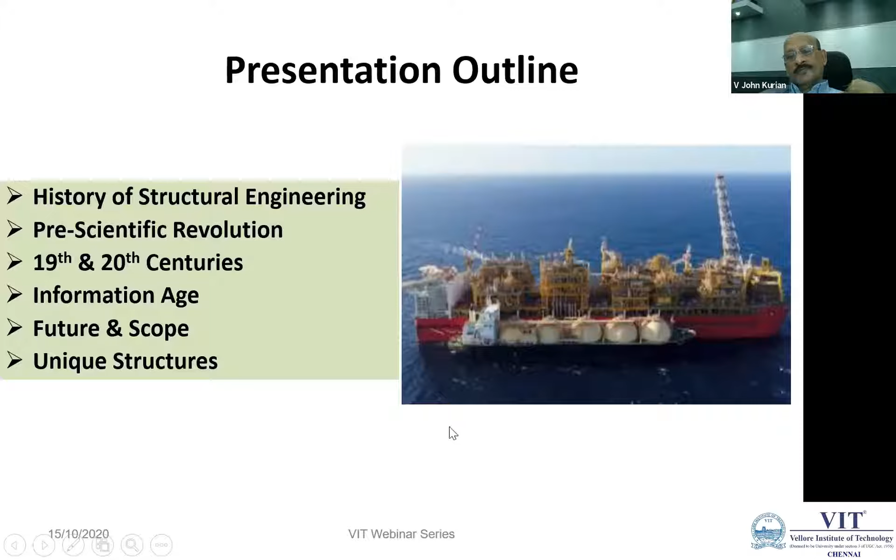The photograph I have shown there is a very large structure - it's the largest floating facility in the world now. It's on the Australian west coast, about as long as three soccer fields. I'll be mentioning briefly about that.

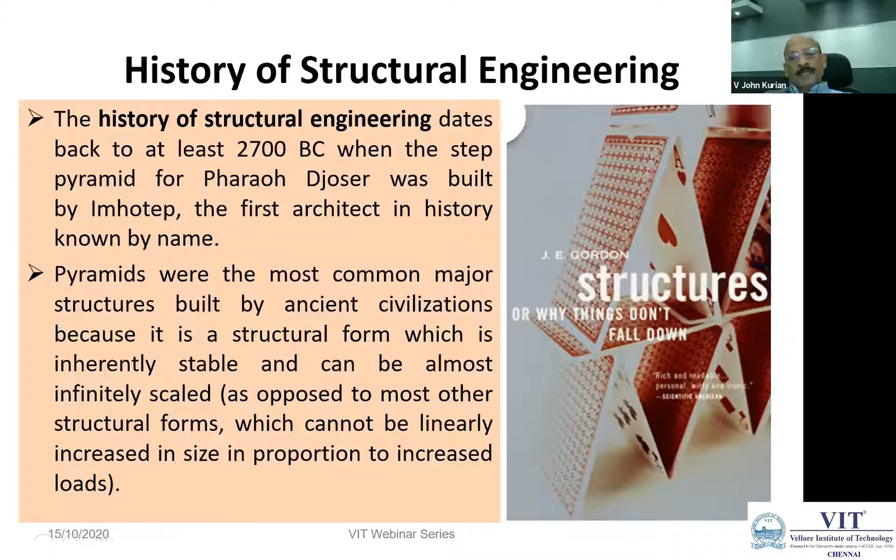This history of structural engineering dates back to 2700 BC. The first major structure built was the step pyramid for Pharaoh Djoser. It was built by the first architect in history known by name, Imhotep. These were the most common major structures built by ancient civilizations because the shape of a pyramid is an inherently stable shape. We can increase the size to any amount, unlike other unstable forms. This form can be linearly increased in size proportional to the loads.

Another notable engineering feat from antiquity still in use is the qanat water management system, something like an aqueduct system. It was constructed around 1000 BC, meaning it's about 3000 years old, and it's still 71 kilometers long and still being used. It was in modern day Iran, at that time called Medes, the predecessors of the Persian Empire. It's one of the major developments in civil and structural engineering, a notable old one.

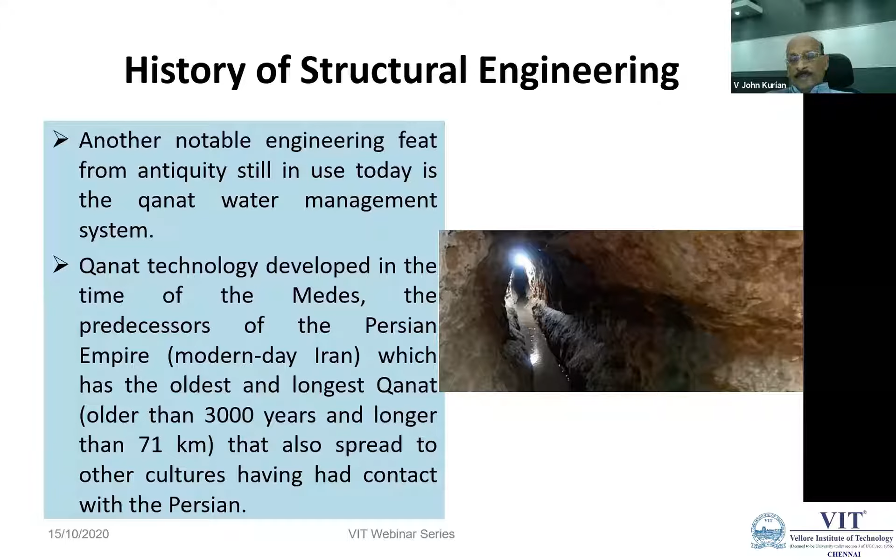Now, summarizing the history: the few points worth noting are that throughout ancient and medieval history, most architectural design and construction was carried out by artisans such as masons and carpenters, and they were the people in charge of the building as well. So they were called master builders, carpenters and masons, who were in charge of architecture as well as construction.

There was no mention of theory of structures there, no calculations were done, and how the structure stood was decided based on the evidence of what had worked before. If they construct, say, a 2-story building and it is standing, they continue to construct 2-story buildings like that using the same materials, then try for another story. If it's successful, they repeat that. There were no calculations or anything; it was based on the materials available at that time, mainly stones and timber.

So the knowledge was retained by guilds, and this knowledge was not supplanted by advances. Structures were repetitive, and increase in scale was only incremental. It was all repetition of the same type of structure. They constructed a structure, it was standing there, meaning similar structures were built nearby based upon the needs.

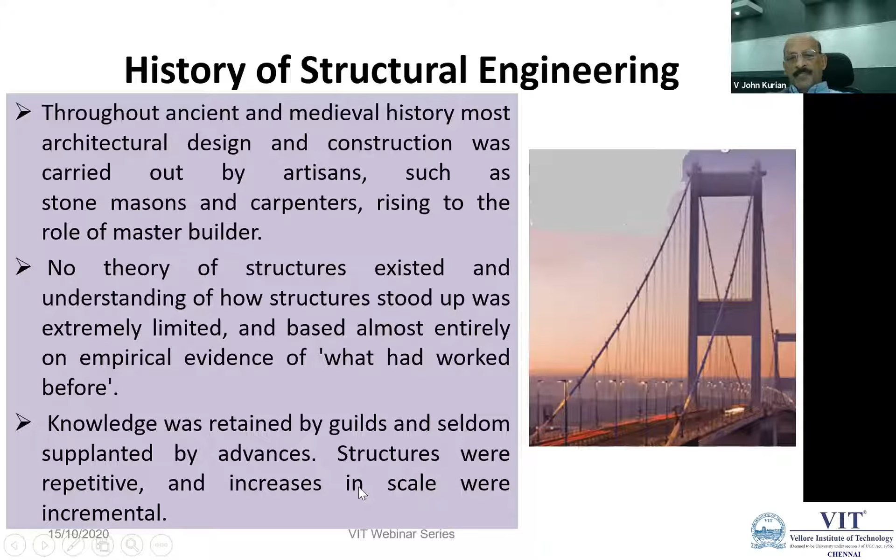So there is no record of this, when you talk of structural engineering we mainly think of engineering mechanics, mechanics of solids, or strength of materials. There was no record of such calculations on the strength of materials or strength of members.

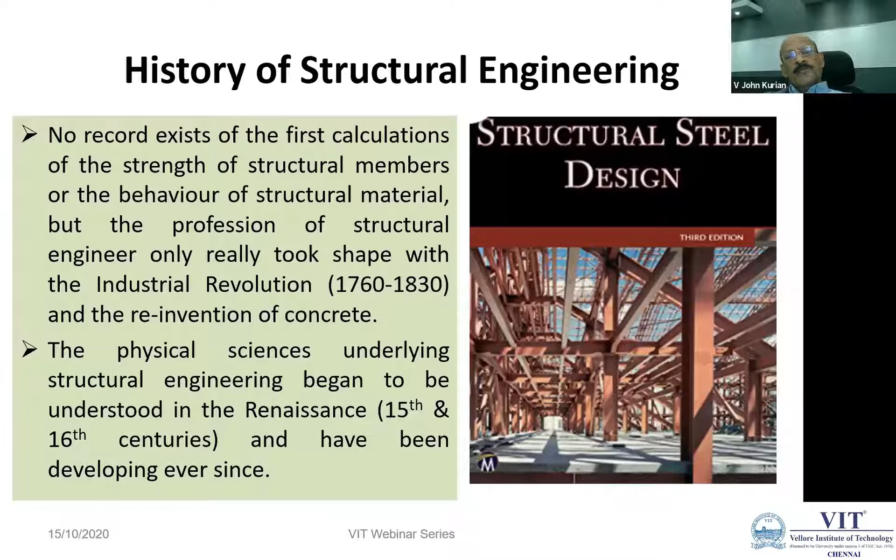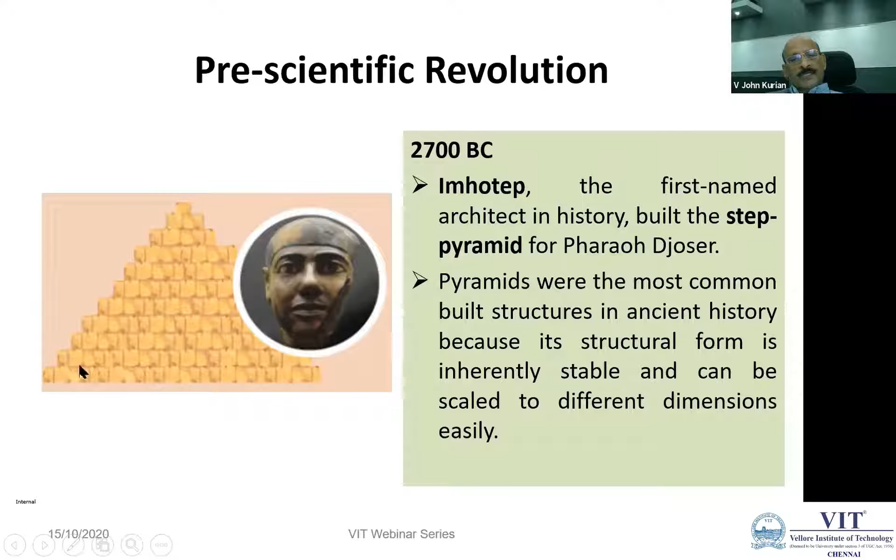Imhotep, the first architect in history, built the pyramid for Pharaoh Djoser - that was the name of the Pharaoh. This is all recorded and available with documents. Pyramids were the most common built structures in ancient times because their structural form was inherently stable, and it can be scaled to any dimension easily. That was the first one, remember it is 2700 BC. Imhotep was the name of the first architect in Egypt. It is called the step pyramid - you can see the size in the photograph and sketch there, stone over stone, it is a step pyramid.

In 2560 BC, the Great Pyramid of Giza was built. It remained the largest man-made structure for millennia until the rise of towers in the 19th century.

Some of you may know the famous film called Ten Commandments. I remember when I was schooling in Chengannur, all the students were taken from school to the nearby theater to see that great film. That is when we saw the Egyptian slaves, the Hebrew slaves, working for the Egyptian King Pharaoh. It showed these pyramids being constructed very clearly, and they were using labor. They were lifting stones using pulleys, a lever and cable system, and human labor.

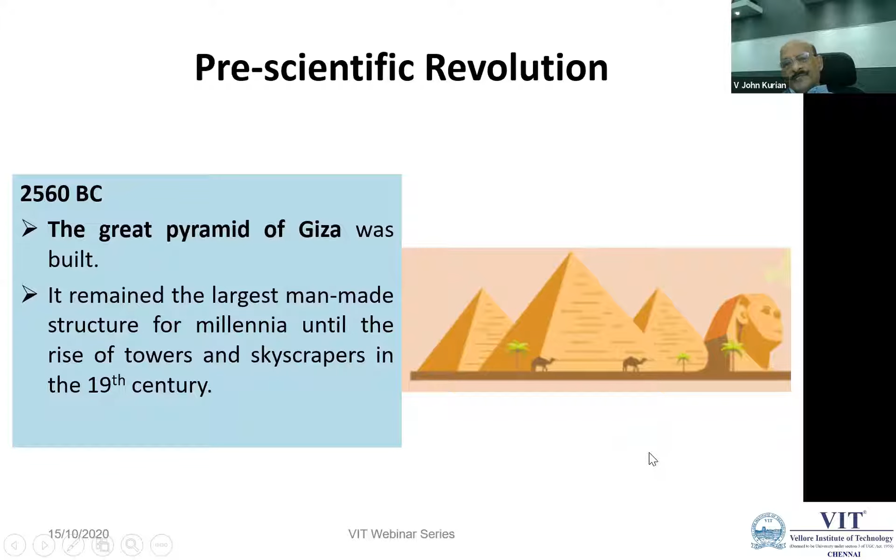3rd century BC: now we'll see some familiar names from undergraduate studies. Archimedes published his work in the 3rd century BC. His calculations on areas and centers of gravity of various geometric figures, including triangles, paraboloids, and hemispheres, underpin most of the mathematics and principles of structures in modern structural engineering. This is the first published work on structural engineering.

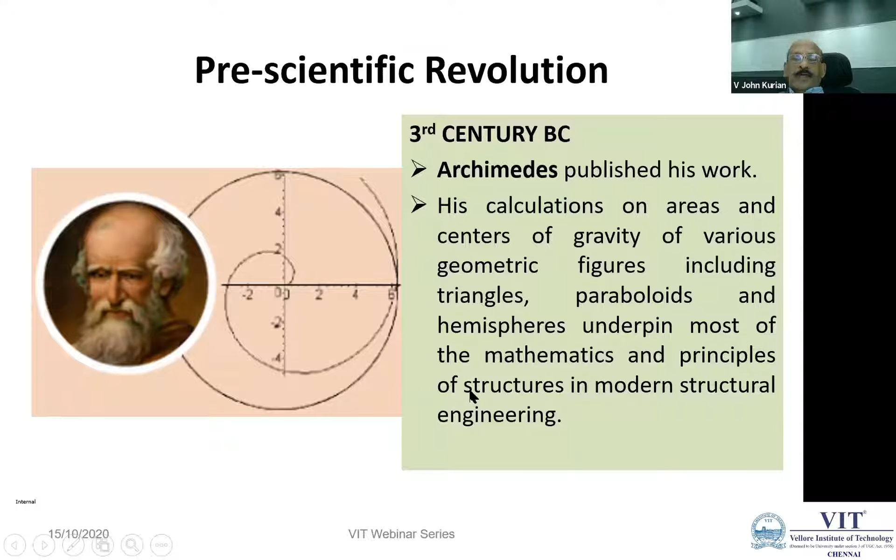His calculations covered areas, volumes, and centers of gravity of various shapes.

1st century BC, Vitruvius recorded in his book De Architectura the methods, materials, and machines used by ancient Romans to build structures such as aqueducts for transporting water, and thermae, meaning thermal baths, which required structural engineering methods, as well as columns, lighthouses, defensive walls, and harbours.

At that time, constructions used available materials and available technology. Even though the technology wasn't written down and they didn't know the underlying mechanics, they used known practices, limiting spans and heights of columns, and spans of beams made of stone or timber.

Ancient Romans were, as we've heard in history, very skilled, as the Roman empire was expanding, building roads, bridges, and other structures. Vitruvius recorded in the 1st century the methods, materials, and machines used by the Romans to build aqueducts, thermae, columns, lighthouses, and defensive walls, since they were warriors expanding their territories, always using defensive walls and harbours because the main mode of transportation was by ships.

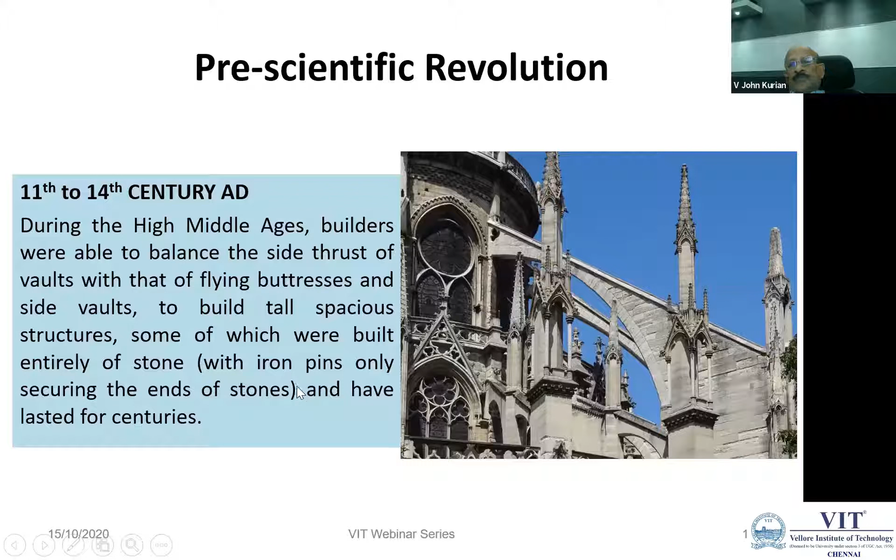Their connections were made using iron pins, with stones connected this way, as shown in some examples. These were special stones, quarried and shaped to suit these purposes. That was from the 11th to 14th century AD.

1638, this is a familiar name for us. You can see the sketch there, gravity, mass, inertia, like that term. So that is where we know of these terms now.

Galileo Galilei published, this is the name of the book, Dialogues Relating to Two New Sciences, where he outlined the sciences of strength of materials, that is what we call these days mechanics of solids or solid mechanics, strength of materials and motion of objects. So that is when dynamics comes in, motion of objects. Two new sciences, that is what Galileo published, dialogues relating to the principles of mass, inertia, gravity, everything there.

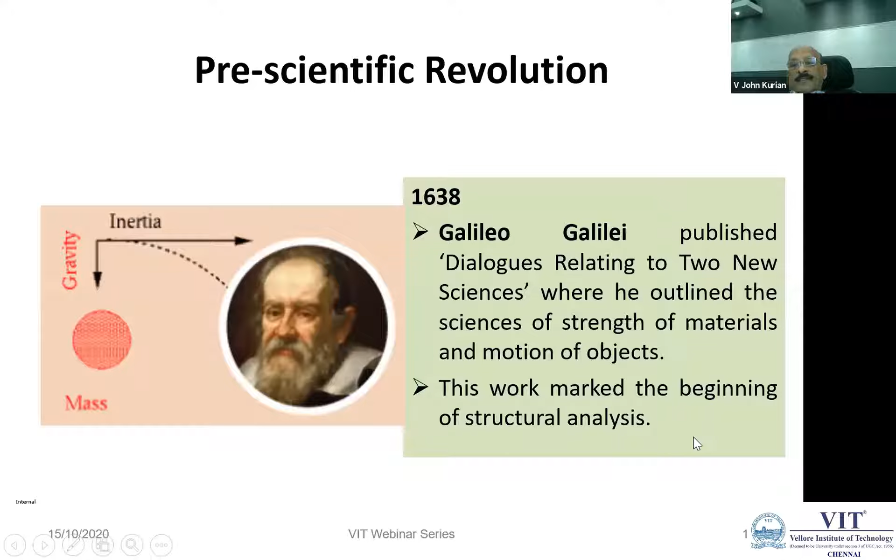This work marked the beginning of structural analysis. That is 1638. We are beginning structural analysis there with Galileo. He is the one who published this book. You are very much familiar about this person, Hooke's law.

The first thing that we studied in strength of materials, stress by strain is modulus of elasticity, capital E. That is within the limit of proportionality. It is very close to the elastic limit, very close to the yield stress. You can see the sketch shown there, that is when a force is applied, it elongates by x. So we can measure the stress and strain and find out the modulus.

When the force is doubled, the elongation is double x. That is what is shown here. This is Robert Hooke. His first statement of Hooke's law provided a scientific explanation of elasticity of materials and their behavior under load. That is 1676.

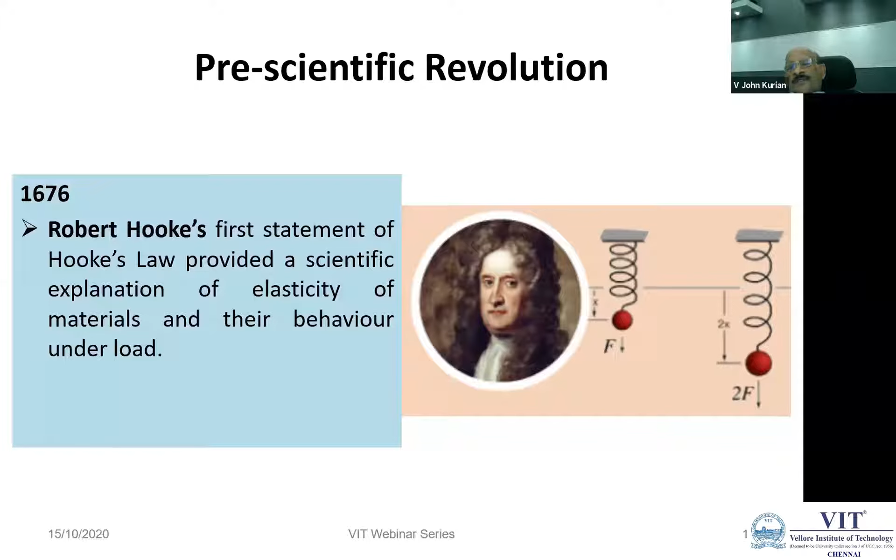Now 1687, Isaac Newton, very famous. You know his three laws, that is what we started in statics and dynamics. Isaac Newton's three laws, that is what we always remember, especially the third law: to every action there is an equal and opposite reaction. I used to tell my students, this is applicable only for structural engineering, but in actual life, you should not react. Okay, look at this book.

Isaac Newton published Philosophiae Naturalis Principia Mathematica, wherein his laws of motion provided an understanding of the fundamental laws governing built structures. That is where he published these three laws of Newton.

Then Newton joined with Gottfried Leibniz. They independently developed the fundamental theory of calculus, which is considered the most important mathematical tool in engineering. You know that every calculation in mechanics of solids, strength of materials, or structural analysis, we always make use of calculus. You know, the differential of shear forces,

UDL load, differential of bending moment is shear force, and when you integrate for y displacement, we get EI into d squared y by dx squared equal to M. You know how to calculate deflection and slope, always starting from the fundamental bending equation. So the theory of calculus is the fundamental important mathematical tool in engineering.

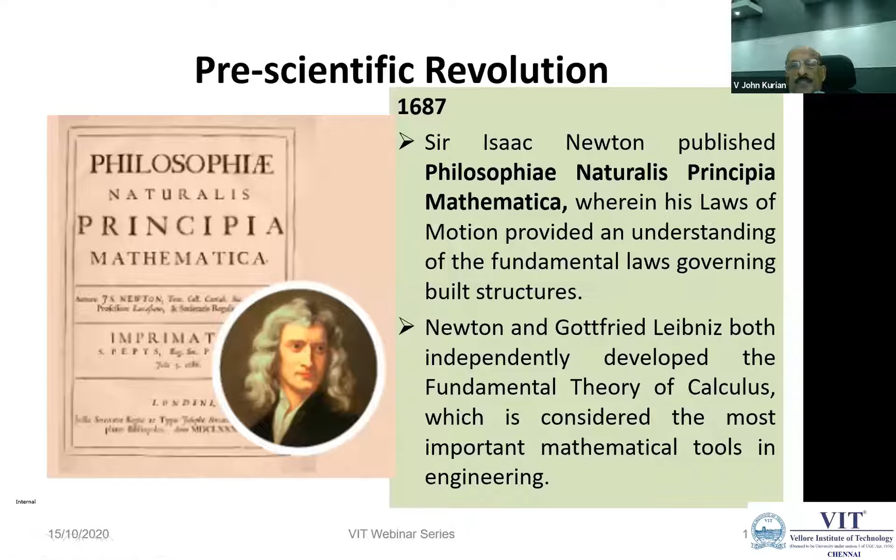The fundamental theory underlying most structural engineering design was developed by Euler and Bernoulli. Then Daniel Bernoulli and Jean Bernoulli also developed the theory of virtual work, which I know is the basic fundamental for finite element analysis. The theory of virtual work is a structural analysis tool that uses equilibrium of forces and compatibility of geometry in solving structural problems. All of you remember, especially third year, second year onwards, that there are different types of methods of analysis.

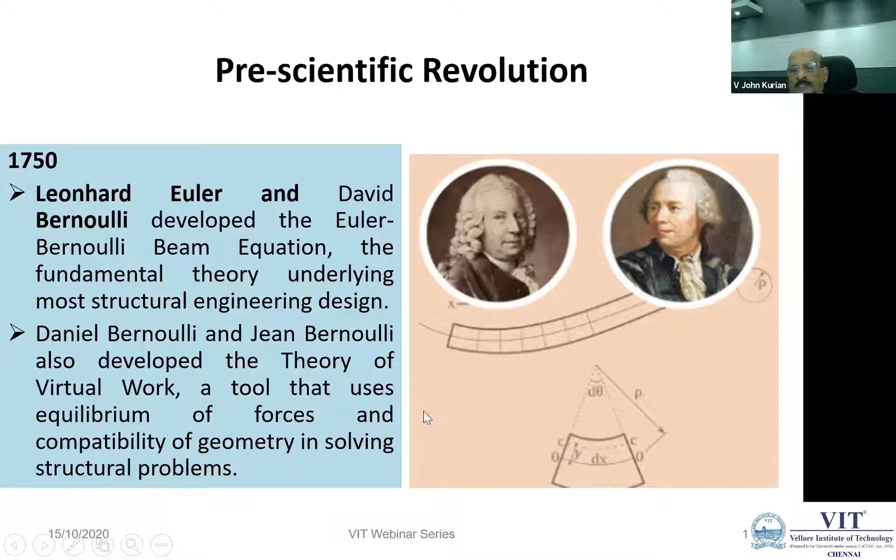Basically, there are two methods, force method and displacement method. Both these methods use equations of equilibrium of forces, as well as compatibility conditions. I'll talk about that later when we come to another slide. There is a misconception or misunderstanding among many students about force method, they're not very clear about these two methods. I may give a little idea when we come to that.

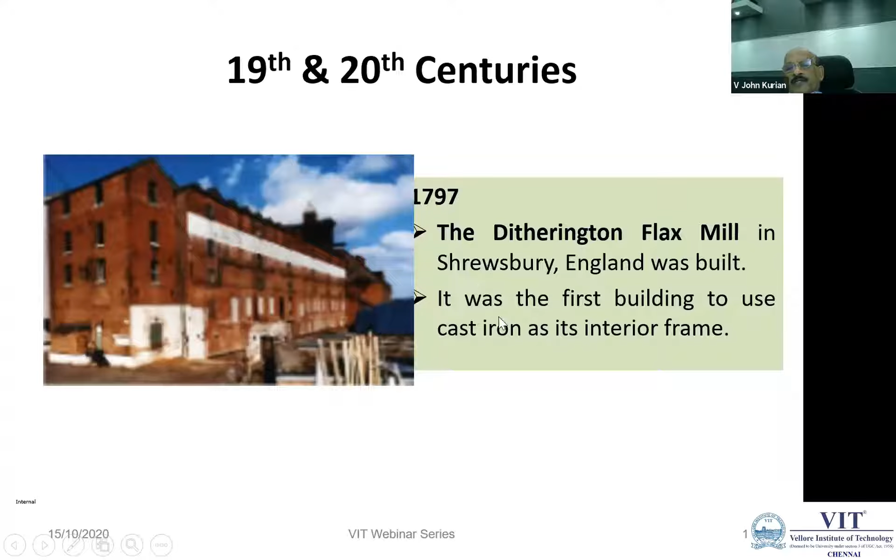In the 19th and 20th centuries, the Ditherington Flax Mill in Shrewsbury, England was built. It was the first building to use, now you see materials are developing, cast iron as its interior frame. Till that time, only masonry, stones, or timber were used, or concrete using the available cement at that time. But that was in 1797, they used the first building using cast iron.

In 1804, Belper North Mill, the world's first fireproof building, was built. This first fireproof building was built making use of cast iron. So they used the principles available at that time and made sure that the building was fireproof.

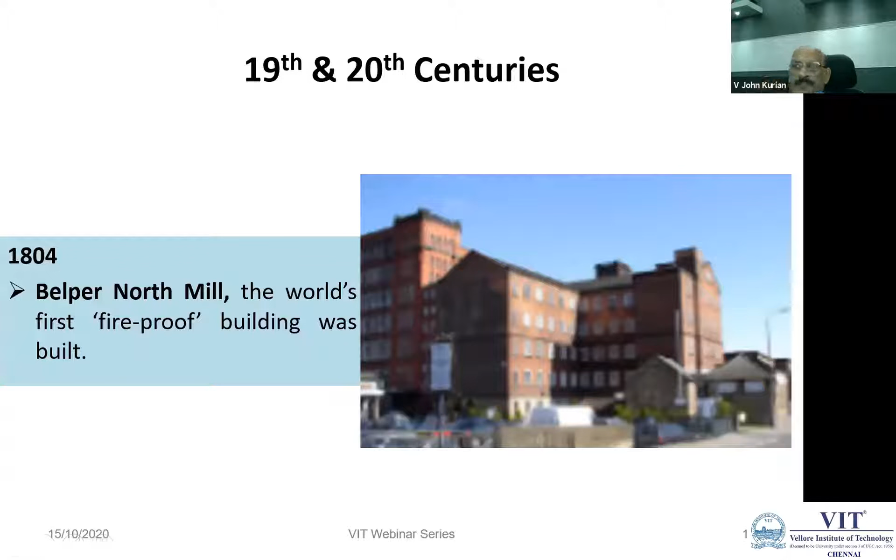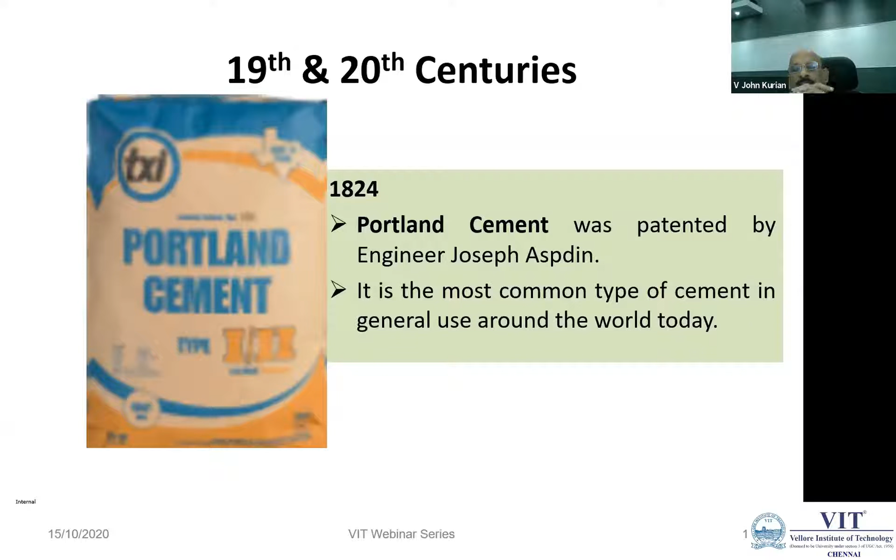In the 19th and 20th centuries, Claude Louis Navier published the elastic theory of beams. This is the elastic theory of bending of beams, and the fundamental derivation of the bending equation, where you derive E by R equals M by I equals sigma by Y. This is all based on the elastic theory of beams, where you use bending.

This person is very famous and can be called the founder of modern structural analysis, because he was the first to highlight that the duty of a structural engineer is not to understand the final failed state of a structure, but to prevent that failure in the first place. It's very important. Till that time, the engineer in charge of the work was only able to find out the failed state of a structure. But Navier made it clear that the duty of an engineer should be to prevent failure in the first place, not just understand it.

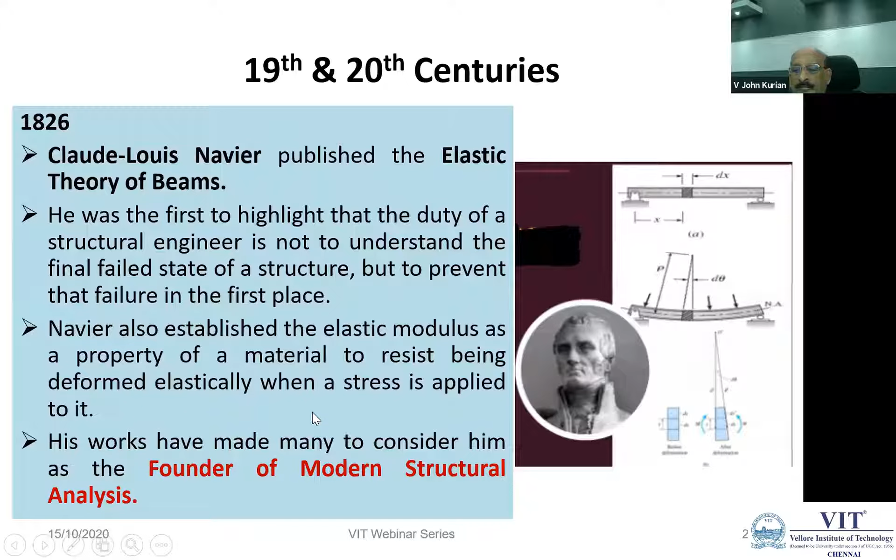He is the one who established the elastic modulus, capital E, for direct stress, as the property of a material to resist being deformed elastically when a stress is applied. So the stiffness and flexibility criteria, and the deflection of a beam or slab, all depend upon this elastic property of the material, elastic modulus E. Navier was the one who established that, and many consider him the founder of modern structural analysis. This was in 1826, almost 200 years ago now, when these principles came together for the benefit of structural engineers.

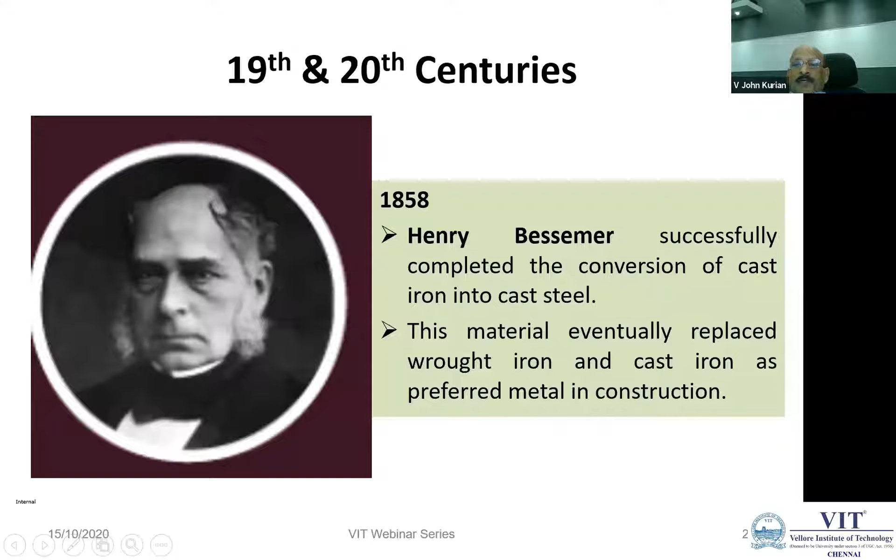In the 19th and 20th century, in 1858, Henry Bessemer successfully completed the conversion of cast iron into cast steel. That's a great development. They were using only cast iron and later wrought iron, and then in 1858 cast steel was developed, which is the main building material now, especially for tall buildings. Concrete and steel are the main building materials now. That material eventually replaced wrought iron and cast iron as the preferred metal in construction.

Some of you may remember, as shown in your brochure, the figure of the Eiffel Tower. Many of us may be under the impression that it is made of steel, but no, it is made of wrought iron. I'll be discussing that now.

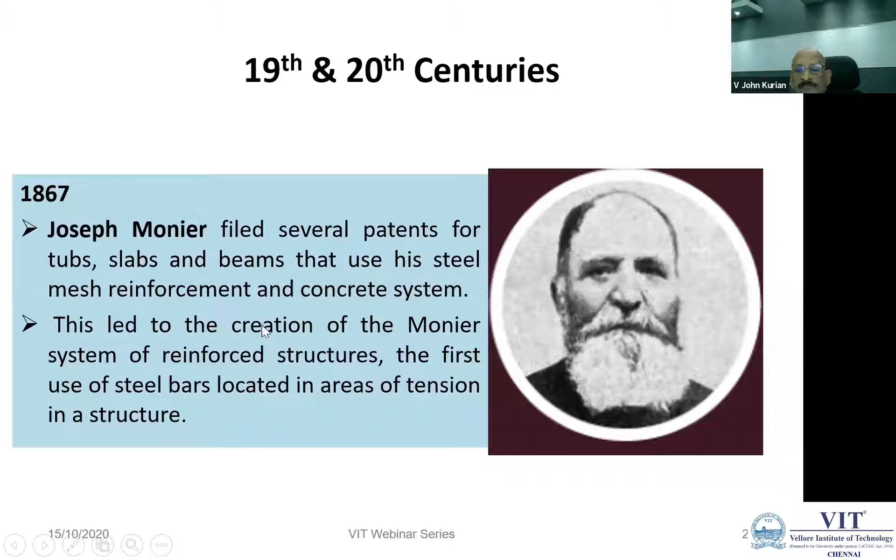In 1867, Joseph Monier filed several patents, when he started using steel mesh reinforcement in concrete systems. He filed several patents for tubs, slabs, and beams using steel mesh reinforcement and concrete, which is when the principle of reinforced concrete came into practice. This led to the creation of the Monier system of reinforced structures, when they started using reinforcement steel bars to solve the problem of concrete's inability to take tension, placing steel bars in areas of tension in a structure. This was a very important development, reinforced concrete, in 1867.

In 1885, William Le Baron Jenney built the Home Insurance Building in Chicago, the first metal framed building and first skyscraper in the world. A frame is beam and column together, connected by braces and everything. This is the first framed building and first skyscraper in the world, built in 1885.

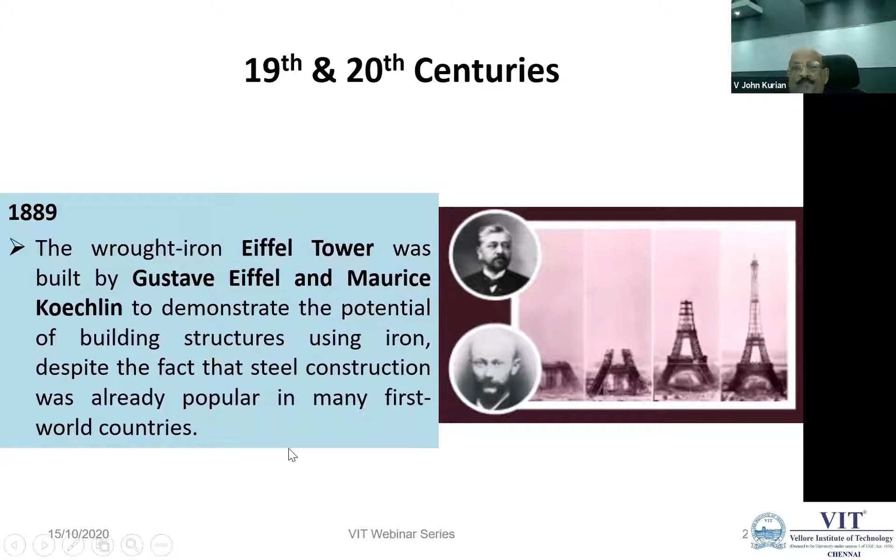Actually, I studied about pre-stressed concrete when I went for postgraduate studies. I remember Professor Srinivasa Rao in IIT Madras. He is an expert in pre-stressed concrete. He's the one who taught us. And he was telling this, I think it is mentioned in this very good book by T.Y. Lin, Pre-stressed Concrete. A very important principle which I have found very useful for me when I teach students about that, pre-stressed concrete. The very important principle is that it is just like prevention is better than cure.

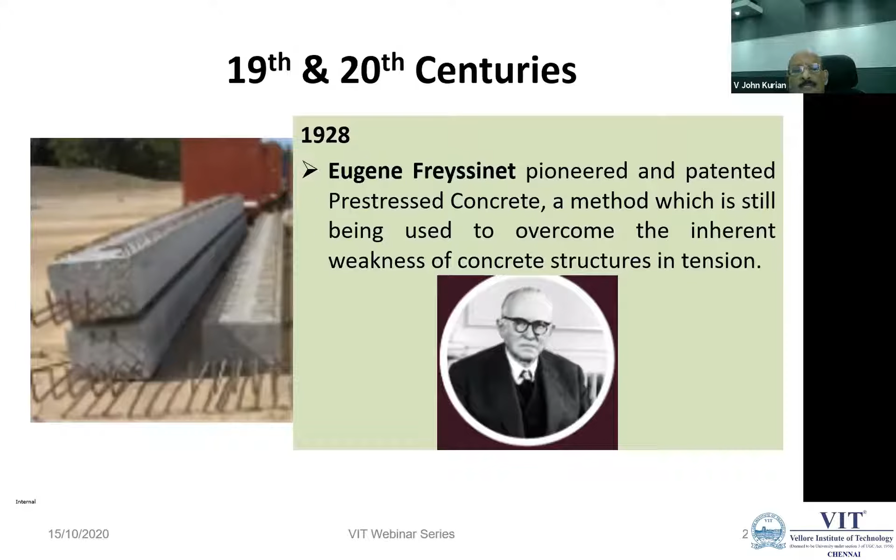1930, Professor Hardy Cross is a very important name. When you talk of moment distribution, Hardy Cross is the person who developed that. In fact, that's a great development in structural engineering. 1930, remember that, Professor Hardy Cross developed the moment distribution method. Only 90 years now. A tool used to approximate the real stresses of complex structures quickly and accurately.

Remember moment distribution? You know about slope deflection. The unknowns are mainly, for a frame, mostly slope and deflection are the unknowns, but mostly for the small problems which we do, other than frames with sway, mostly only the slopes are the unknowns. And when we were students, more than three unknowns, it was very difficult to solve the equations within the time allotted for the examination. So three unknowns, okay, but not more than that at that time, because we did not have calculators. We were using slide rule, and logarithmic tables like that for all these.

When it came to more than three unknowns, it was very difficult even for design engineers. So we developed the moment distribution method, which gave us ideas for when you are developing a multi-story building. If there is a span, there is a moment distribution to be done. We are not taking the whole spans of the multi-story building. What we did was just consider only one story above, one story below, and then only one span to the left, one span to the right, and did approximate moment distributions.

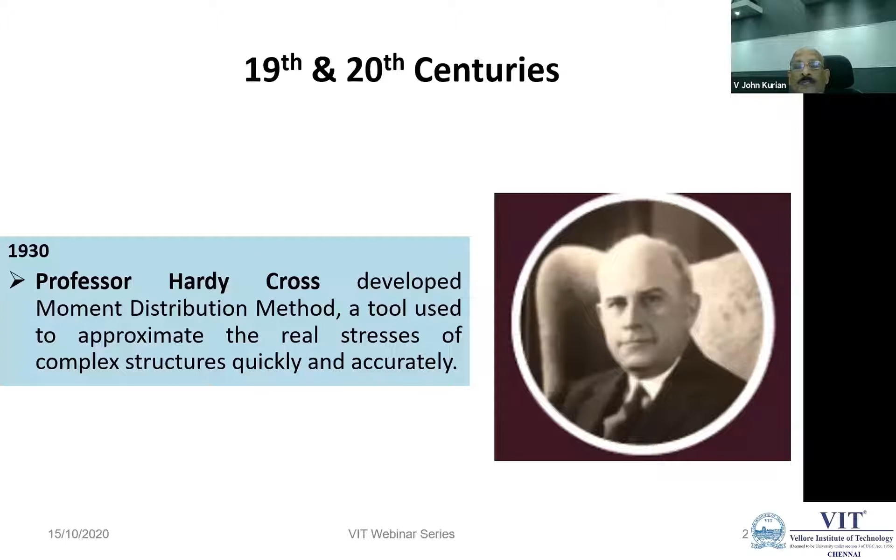Later, it is based on slope deflection method, but when there were more than two or three unknowns, it was very difficult, because we did not have calculators or computers. There was no way to solve equations with more than three unknowns except by written calculations, which took a lot of time.

I added another slide here on force method and displacement method. Probably some of you may not know this. In my career, I interviewed many students during final year projects, and even postgraduate, undergraduate, and PhD students for job interviews. But when I asked them about the fundamentals of this, they didn't have much idea. So please remember this for your benefit.

Consistent deformation method is a force method. What we do is form equations based on the unknowns like the reactions or the joint moments. You write down the equations, and finally it is solved by taking the compatibility conditions. So you develop the unknowns in terms of the displacements, and then use the compatibility condition, just like the simple example of a propped cantilever.

The three-moment theorem also involves writing equations in terms of the joint moments. Finally, we use the compatibility condition using the moment area theorem, equating the intercept on the left side and the intercept on the right side. That is how the three-moment theorem is developed.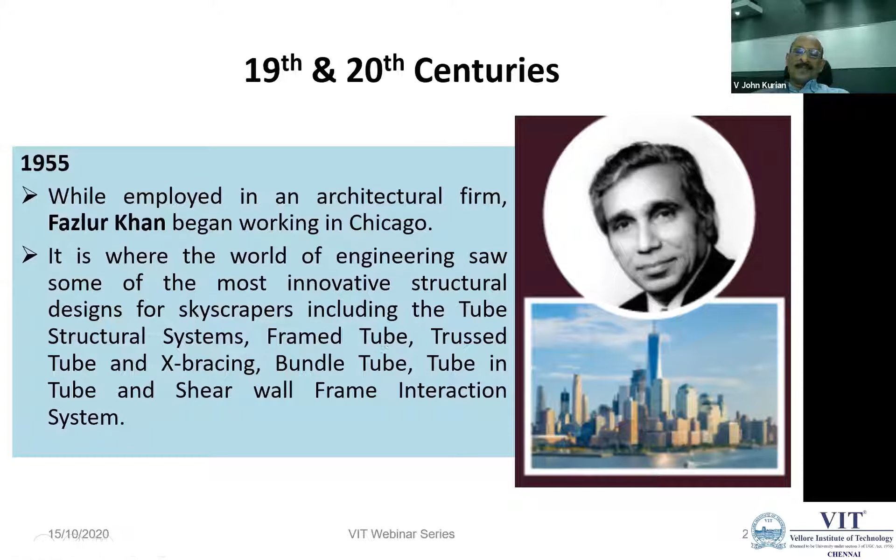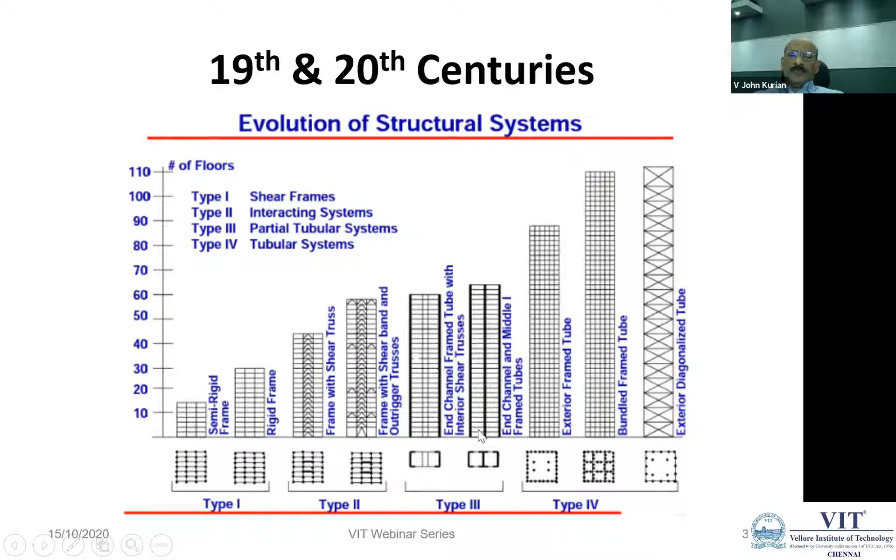I'm showing another slide here showing the evolution of structural systems. Type 1 is shear frame. Type 2 is interacting system. Type 3 is partial tubular system. And type 4 is tubular system. You can get a lot of information on this from websites and literature - the basic information is available, especially on Wikipedia.

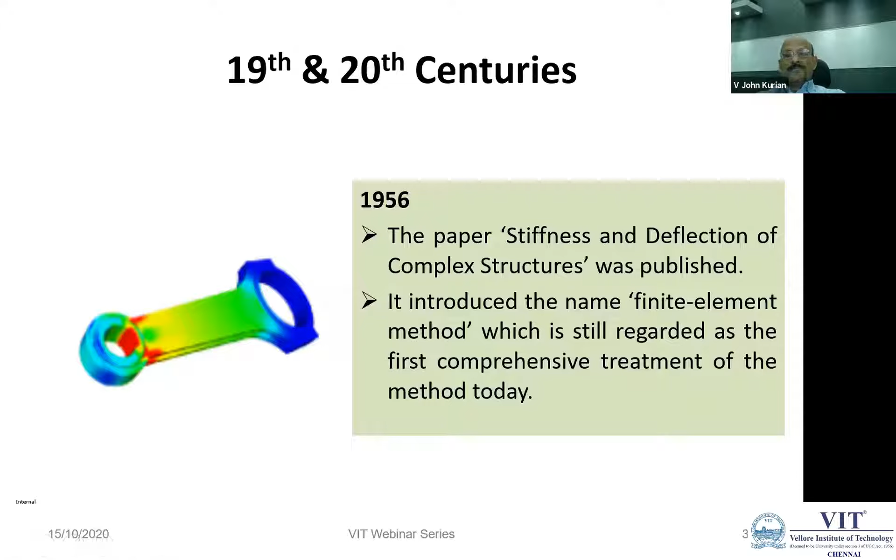Now we're coming to 1956. The paper 'Stiffness and Deflection of Complex Structures' was published, and it introduced the name finite element method, 1956, which is still regarded as the first comprehensive treatment of the method today. When we were students, we did not even hear about this name. What we learned was slope deflection, moment distribution, Kani's method, and we made analyses based on those and did projects. Finite element method was not taught in universities at that time.

1965, Nastran - that is where structural analysis developed first. It is structural analysis done by NASA, US. That program is the foundation for all the structural analysis programs developed later, like STAAD Pro, CSI SAP, SACS, and many other programs. This is the fundamental thing: dividing the structure into finite elements. Depending upon the need for accuracy, the number of elements can be more, and we use different types of elements based on whether it is a plane frame, a solid frame, and so on.

1969, they initiated the first commonly available software called Nastran. They called it that because the company was MacNeal-Schwendler Corporation - so this is called MSC software, MSC Nastran. That is 1969, the first generation of finite element analysis software.

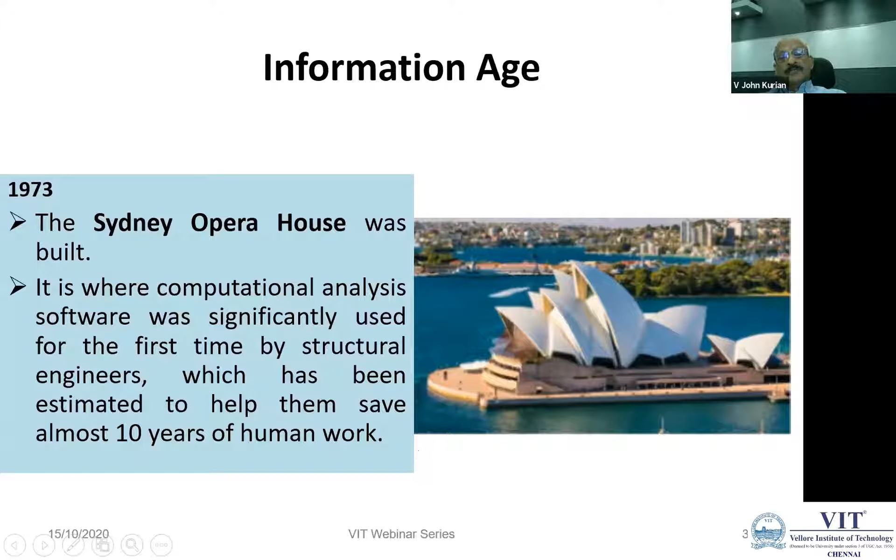That's the information age developments now. You can see the Sydney Opera House - it was built in 1973. If we had used manual calculations before that, it would have needed 10 years of human work to complete all the calculations and designs. But because this software was available, and they used particular elements suited for this structure - plane frame, solid frame, shell and plate, all different types of elements - they saved almost 10 years of human work for consultancy. This was in 1973. Remember, I graduated in 1967.

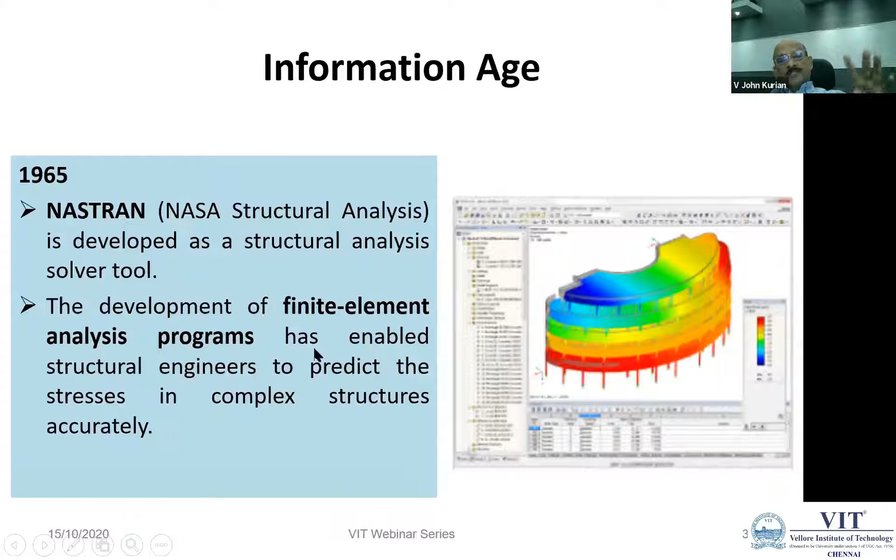At that time, NASA's software was just developed, still not generally available. 1982, another great development: Autodesk introduced AutoCAD, which is still among the most widely used CAD programs used by structural engineers. You know the purpose of AutoCAD - every university, every engineering college uses this. That is a basic tool.

At that time, when we were students, we studied engineering drawing and graphics using fundamental basic methods. These days engineers are familiar with all these types of programs, so there is no need to make all sorts of drawings by ourselves like we used to do in olden days - we can do everything with Autodesk.

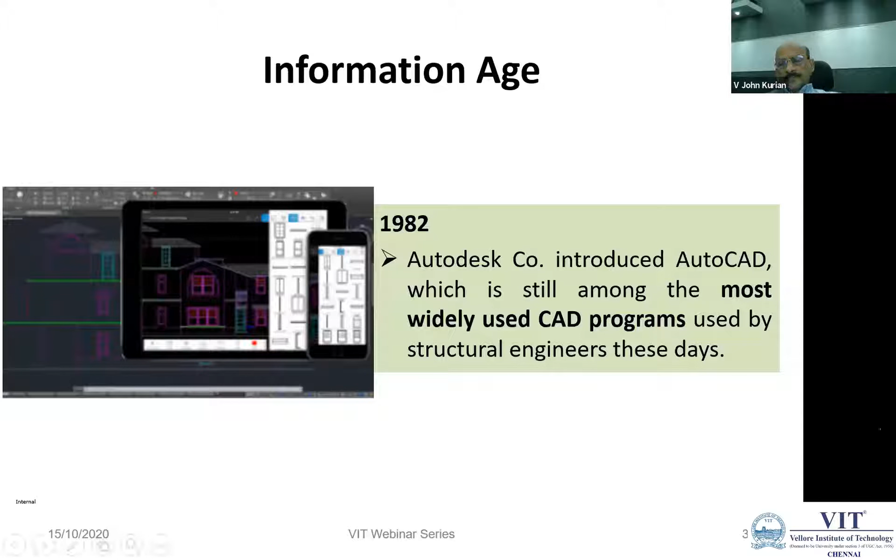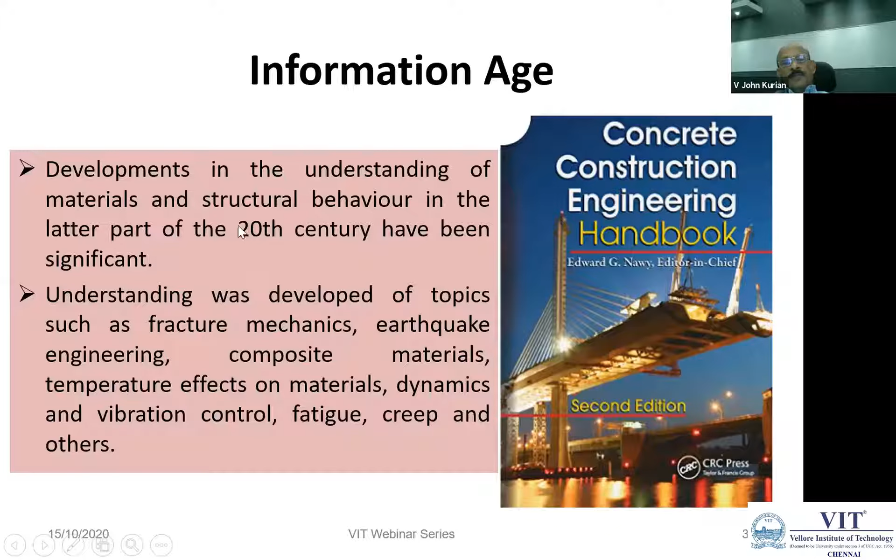Later developments include improved understanding of structural behavior and materials - concrete, for instance, saw great understanding developed later. Fracture mechanics was a great development, important for steel too. Earthquake engineering helped improve structural analysis a lot. Composite materials meant we could use more than one material for construction. Temperature effects on materials, dynamics and vibration control also developed - when constructing buildings where machinery operates, control of vibration and dynamics becomes important. Fatigue, creep, and other areas saw great understanding develop in the latter part of the 20th century.

I have about 5 minutes more. I'll be winding up soon.

The depth and breadth of knowledge now available in structural engineering, and the increasing range and complexity of different structures, have led to increasing specialization of structural engineers. There are specializations for tall buildings, challenging offshore oil and gas constructions, floating constructions, underwater constructions, and long bridges.

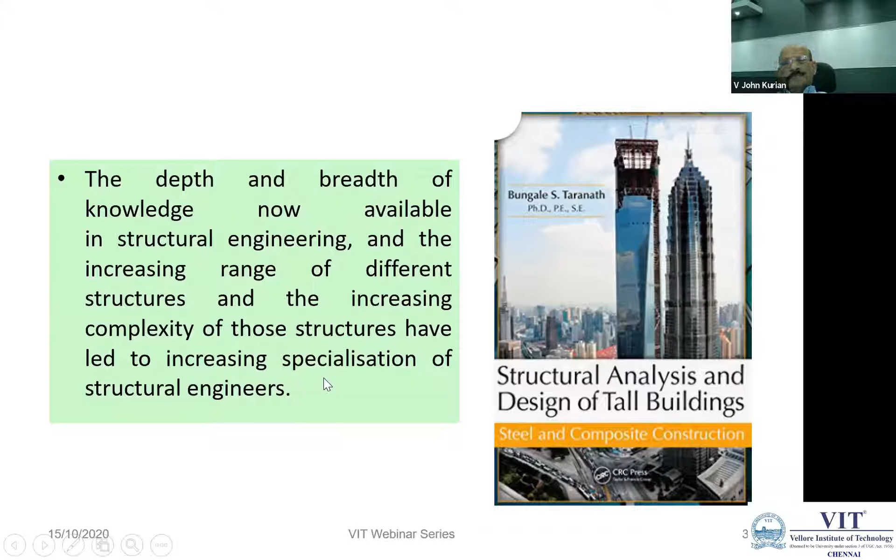Another important term we use now is BIM. If a civil engineering graduate gets a certificate on BIM, that's the best thing, because in any interview, interviewers ask: have you heard about BIM? Have you used BIM? Have you got a certificate on BIM?

The term building information model is a great software, a great facility, a great facilitator that combines all the components of buildings into one. That means you can combine structural engineering and all related things, whether it is bar bending, plumbing, electrical connections, extra piping, or extra paneling, all put together in BIM. I'm glad to tell you our students are also making use of that.

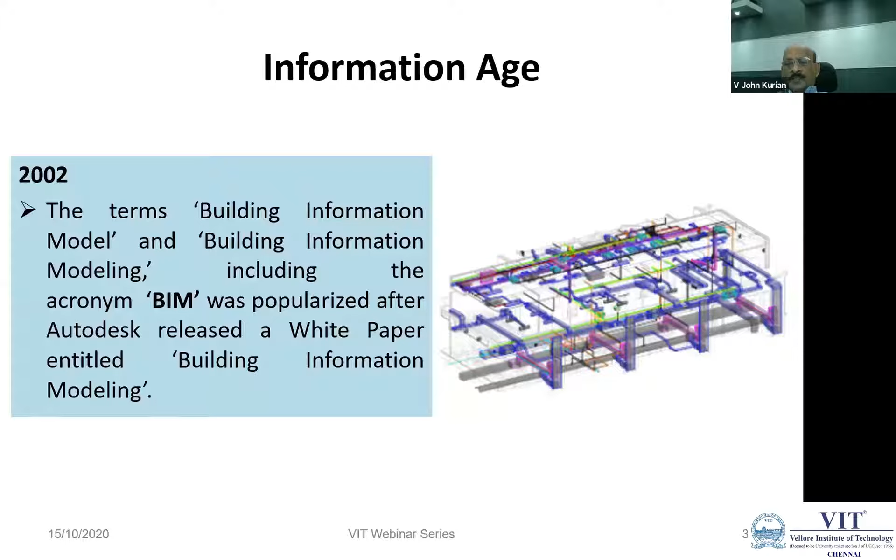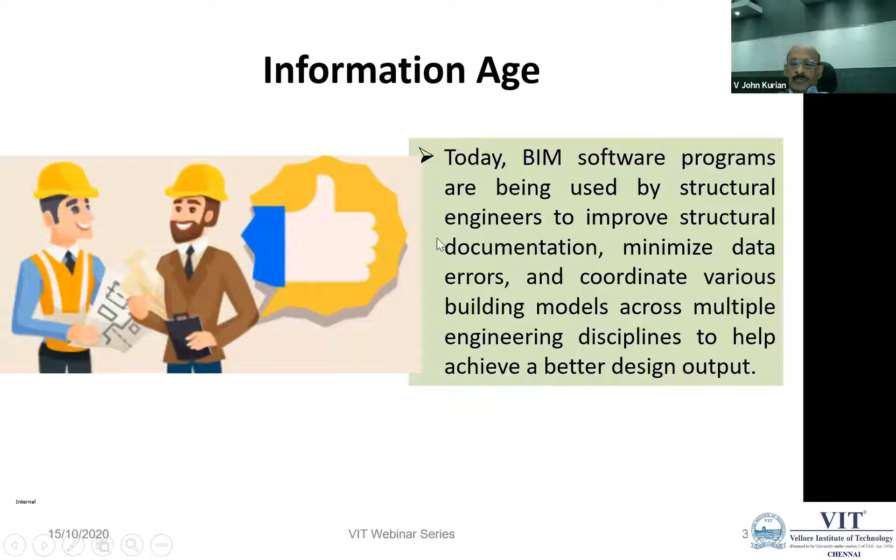Today, BIM software programs are being used by structural engineers to improve structural documentation, minimize data errors, and coordinate building models across multiple engineering disciplines to help achieve better design output. All these historic milestones greatly contributed to the advancement of structural engineering. As this field advances, people can expect structures with even greater structural efficiency and safety than modern buildings have today.

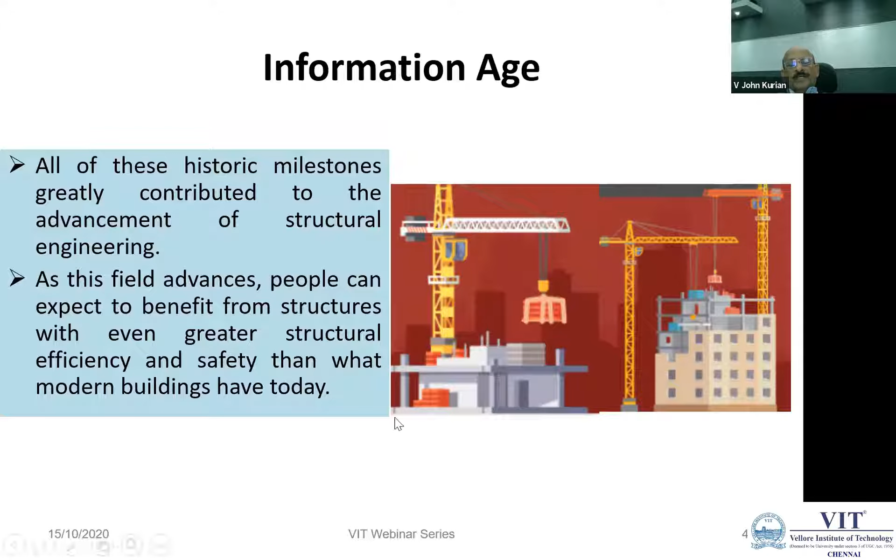Its purpose is collecting natural gases from nearby resources, processing them into liquid form, then transporting it using LNG carriers to wherever it is needed, where it is converted back into gas and supplied to customers.

This facility has only been standing for 2 years since completion. It's a great masterpiece of structural engineering. Not only is it a floating facility, but every component is tightly packed. If you wanted to build such a facility on land, it would require 10 times the floor area needed here, which is why it is constructed floating.

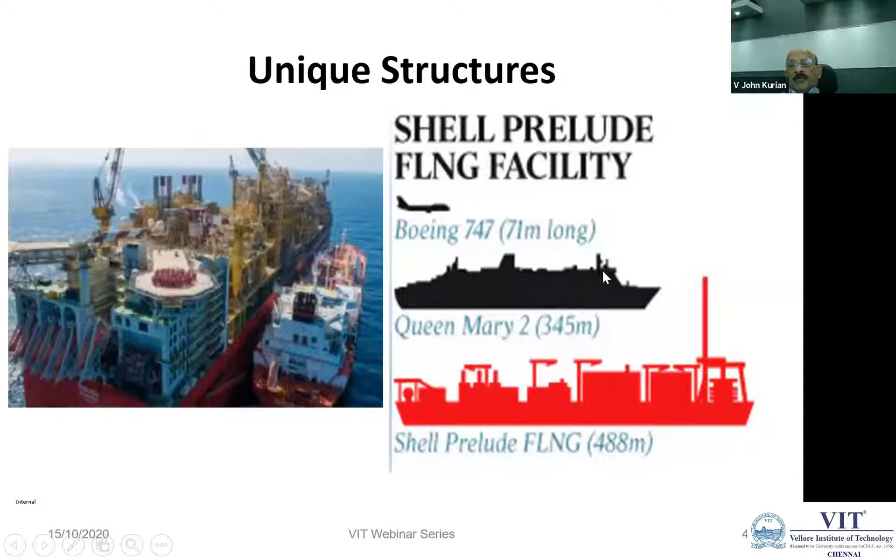Compared to a Boeing 747, which is only 71 meters long, this is about 7 times that length, very large. Its name is Prelude, it belongs to Shell company, you can Google it to find out more. Until its construction, the largest ship was the Queen Mary, at 345 meters.

One more structure everyone knows about, this unique structure, was called Burj Dubai. Now its name is Burj Khalifa Tower, because Dubai had to sell it to Sheikh Khalifa of Abu Dhabi. It's 830 meters tall, the tallest building now in the world, with 160 stories. These are all masterpieces of structural engineering.

Let it be any structure, any shape you want, you can build it and design it using the advancement of structural engineering now. Please remember, when dealing with architects, you have to be very cautious, because architects may bring any shape which is pleasing to the customers.

Structural engineers have to make sure that load is properly transferred to the members, to the components, and then to the foundation. So when dealing with an architect, it is not just about pleasing the customer; you have to make sure the structure is safe and stable, because architects will prefer slender structures, but the structural engineer has to ensure it is safe and stable based on the analysis and calculation available.

Now the challenges are there, no problem, let it be any challenges. We have got methods of analyzing such types of structures by using particular special elements for those shapes. With finite element analysis, you can get the desired accuracy. There are very, very accurate and very powerful programs.

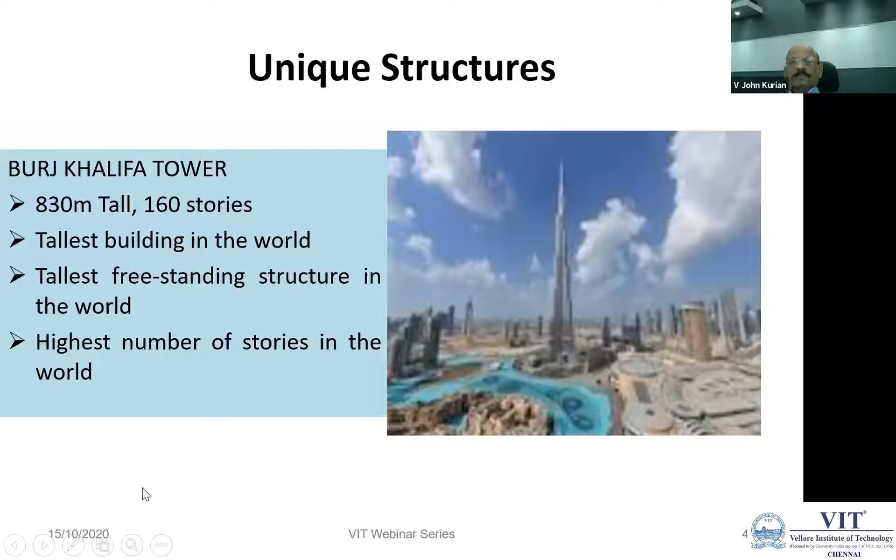Okay, now I come to the end of the presentation. I think I'm right in time.

And that's the end of my lecture. Thank you very much, thank you for this opportunity. I'll be glad to answer some clarifications based on my knowledge and experience. So over to you, back to the coordinator.